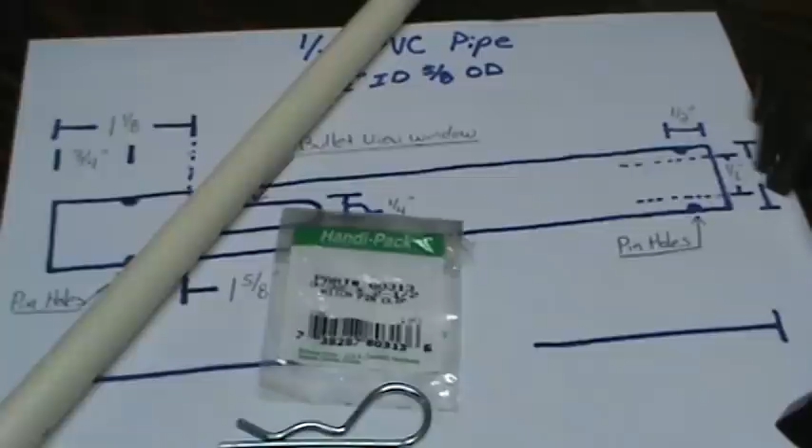You're going to need a 1/2 inch PVC pipe. You can get all this stuff at a hardware store. It's actually a 1/2 inch inside diameter and a 5/8 outside diameter. You're going to need 3/32 by 2.5 hitch pin clips. Depending on how many of these tubes you make, you're going to need one for each end, so you're going to need 2 for 1 tube. The PVC pipe, to go back to that, you can buy it in either 5 or 10 foot lengths. I bought 5 foot lengths. It's easier to work with.

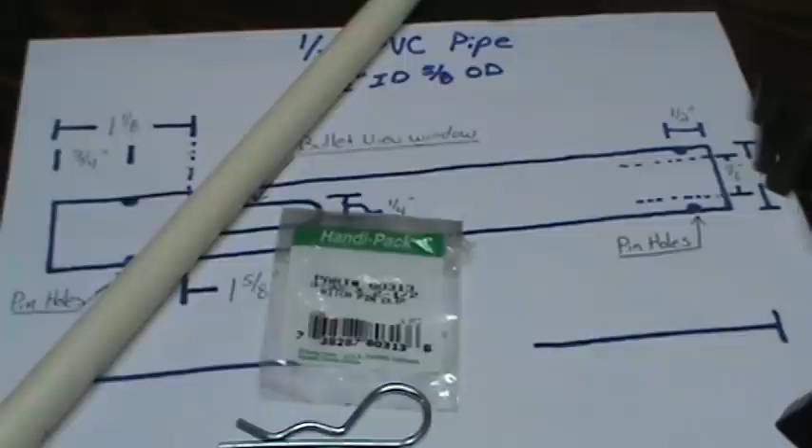You're going to need an electric drill, a countersink bit, and a deburr tool. I got kind of a fancy one, which you'll see in machine shops or factories and stuff like that. If you don't have that, just use a round file, a fine one, to do that.

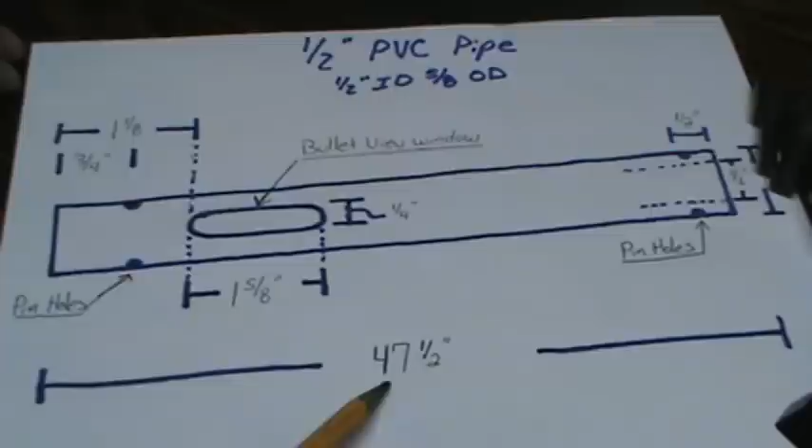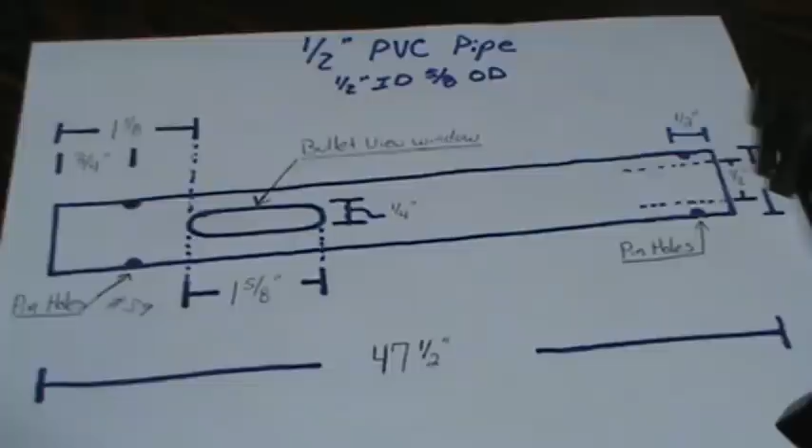Basically what you're going to do, here's just a simple cheesy drawing. What I went with is my tubing was 47.5 inches long. The pinholes, I actually used a number 39 drill bit to drill that hole out. And here's an example right here. That's for this hitch pin to go into, and that's what's going to hold your bullets from falling out. So that's how that end's going to look. From the end of the tubing to the pinholes, it was 3/4 inch where I drilled a hole.

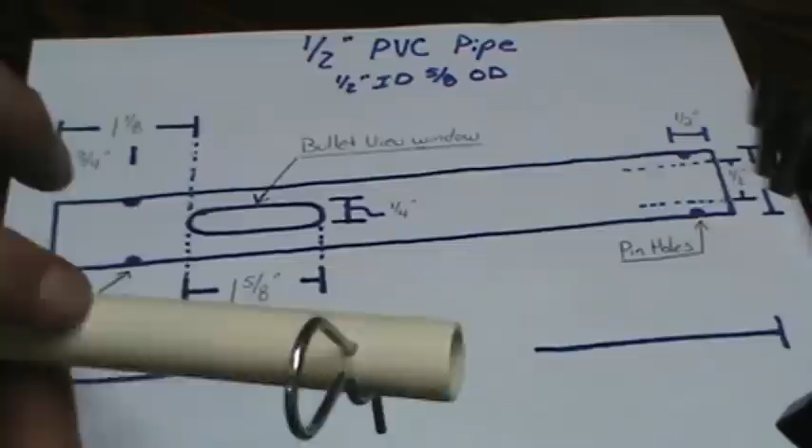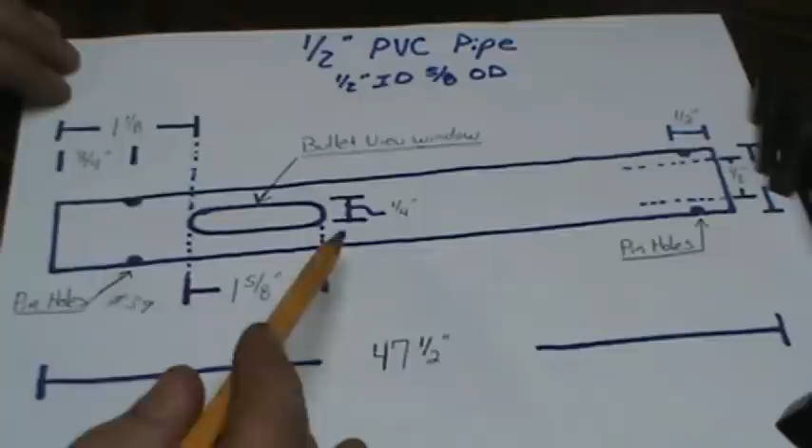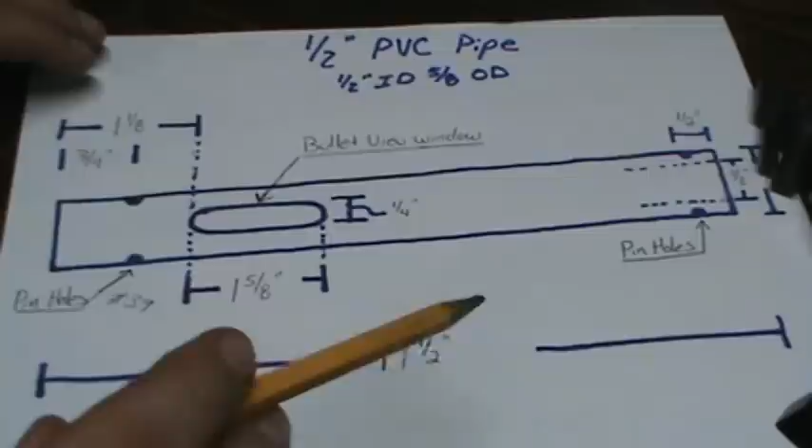From that, I turned the tubing a 90-degree turn, and that's how I machined the window so you could view the bullets. From the end, that was 1 1/8 inch, and the whole length of the window was an average of about 1 5/8. It's just an example. You don't have to go with the same measurements if you don't want to. And then toward the end here, it was 1/2 inch. I drilled another hole for the pin, again with a number 39 drill bit. The outside of this, like I said, is 5/8, and the inside diameter is 1/2 inch.

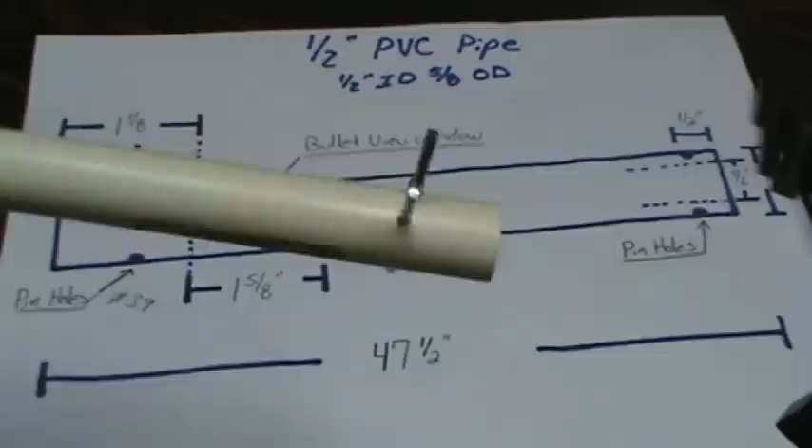So after you get your tubing made, it's pretty much going to look like this. There's the pinhole, and then a 90-degree turn, there's the window so you can view it. As I flip the tube around to the other side, I got this pinhole lined up exactly in the same line with that one. I'm trying, there's not enough room here. So that's in line with the other one. So remember, these pinholes, it just makes it easier. You'll see it when it's set up.

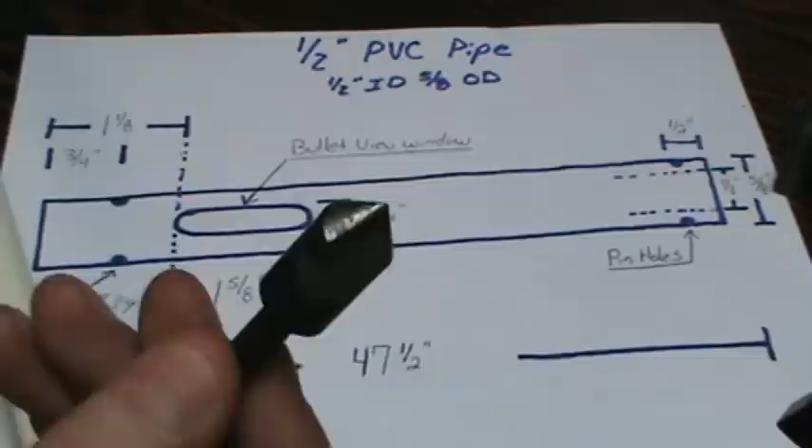Then on the end that has the window, on the inside of that pipe, the countersink tool, not deburr tool, sorry. This is just an example of the different kinds you can have. You can have a single cutting edge, or you can have a multi-cutting. I don't know if I can get it in that. These are the type I like. They cut a lot better. These are just for example.

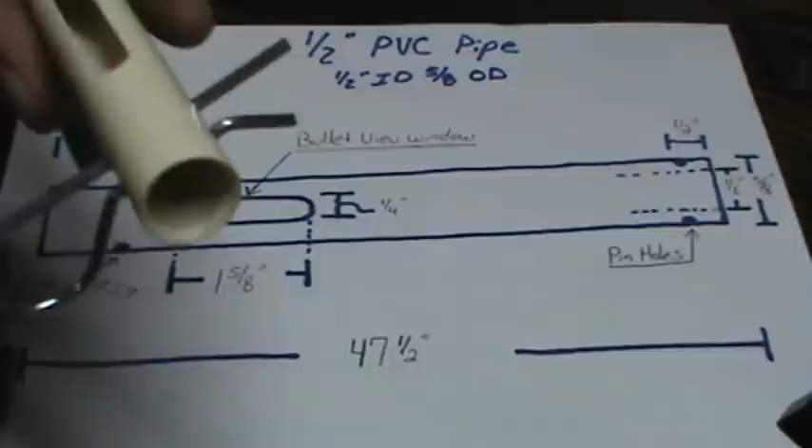These are too small for that, but you're going to go in there and countersink this end right here. After you get all that done, you're going to come in here with the deburr tool, clean that out, clean out the window hole, and the same on the opposite end, clean that out with the deburr tool.

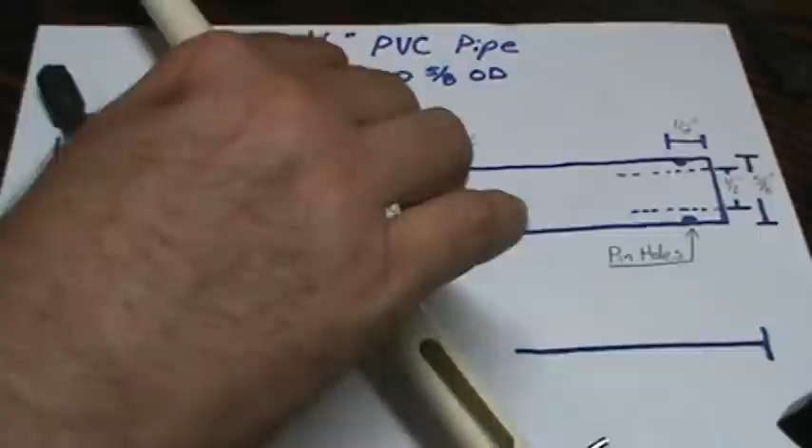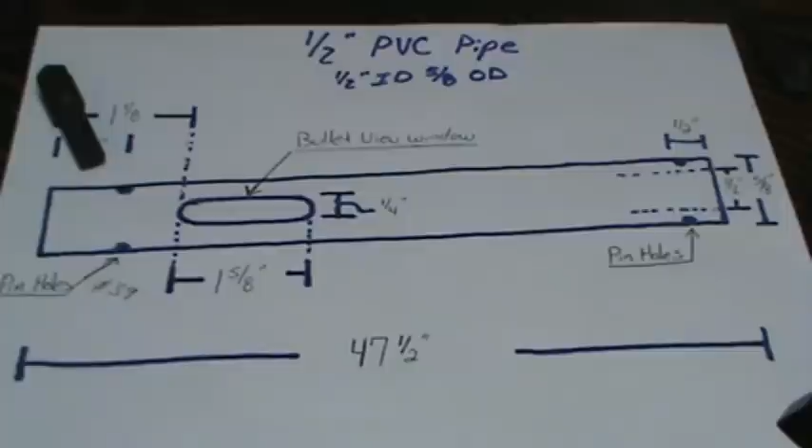Now after you get those all made, I got 6 of them made. So you can have 6 of them done at 47.5 inches, and with 45 caliber ACP bullets, I can get an average of 74 in one of these. So there's a good amount of weight. Here's an example with one loaded with the bullets, so you can view the bullets, and that's how it's going to look. If you need any more details on any of this, feel free to ask. I can always send you more detailed information. This is just giving you ideas.

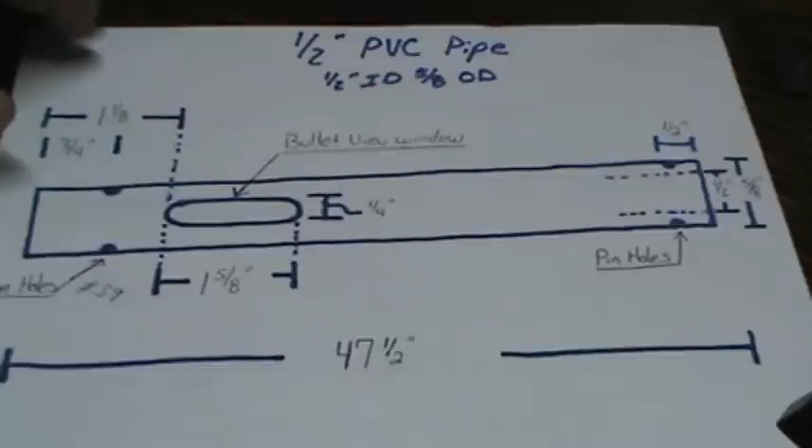To cut your pipe, if you buy the 10-foot lengths or even the 5-foot lengths, if you don't use the whole 5 foot, you can use one of these. These work just as well on the plastic as they do on copper pipe. So from there, I'm going to set this up, and I'm going to go over with you how I got it set up.